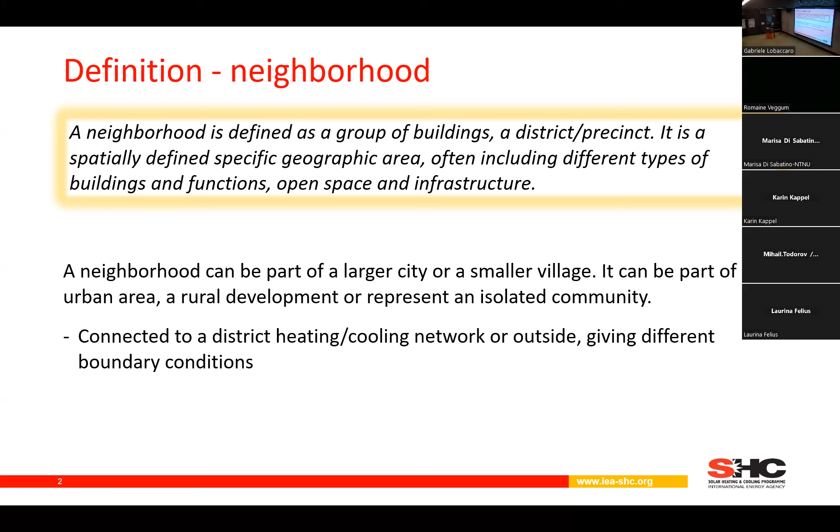So for solar neighborhoods, I want to highlight all the benefits we can have using solar in neighborhoods. We can use it for passive solar energy, both indoors and outdoors, to reduce heating demand and improve thermal comfort and health. We can use it for daylighting buildings and outdoor areas, and in this way reduce electricity for lighting and improve visual comfort and health. And we can use it, of course, to produce energy locally using PV and solar thermal systems, creating energy and resource efficient, self-sufficient environments.

And then we don't have to rely so much on energy imports, and we can create resilience to energy price fluctuations. Today this is really relevant in many countries. We can use it also for local food production and green areas for improved air quality and reducing stormwater.

There are a lot of benefits here, but we don't use solar as well as we could, as much as we could. There are good examples, and you will see a lot of them today, but we need to do more.

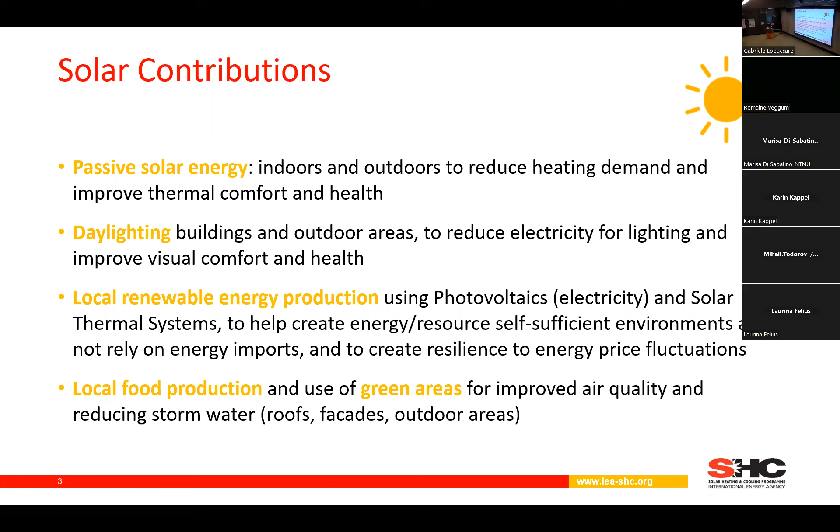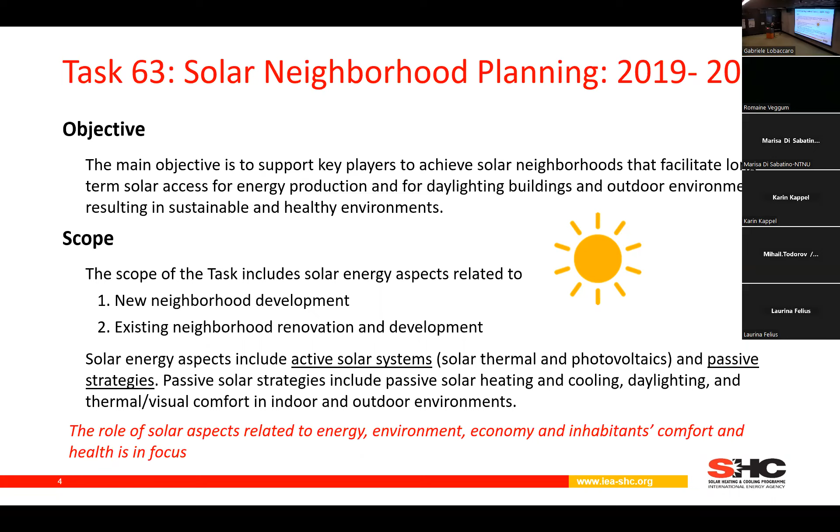That's why we started this project, Task63, on solar neighborhood planning. It started end of 2019 and ends end of this year. The main objective is to support key players to achieve solar neighborhoods, to facilitate long-term solar access, resulting in sustainable and healthy environments. We deal with both new and existing neighborhood developments, working on all aspects of solar energy, relating to energy, environment, economy, and the inhabitants' comfort and health.

We try to be organized in 4 subtasks, with different leaderships. Subtask A, on solar planning strategies and concepts, has a Canadian leadership. Subtask B, on economic strategies and stakeholder engagement, has an Italian leadership, and Silvia is here today.

We have subtask C on solar planning tools, jointly led by Sweden and France. Yuri and Martin are here today also, you will meet them. And we have subtask D, case studies, dealing with all the other aspects from the other subtasks, led by Norway. Gabriele and Mattia are here today also. You get some support from the other leaders as well. And then I'm the overall project leader.

We are 9 countries participating in this project, from Australia, Canada, China, and some European countries. I won't say more now, you will listen to all the experts presenting.

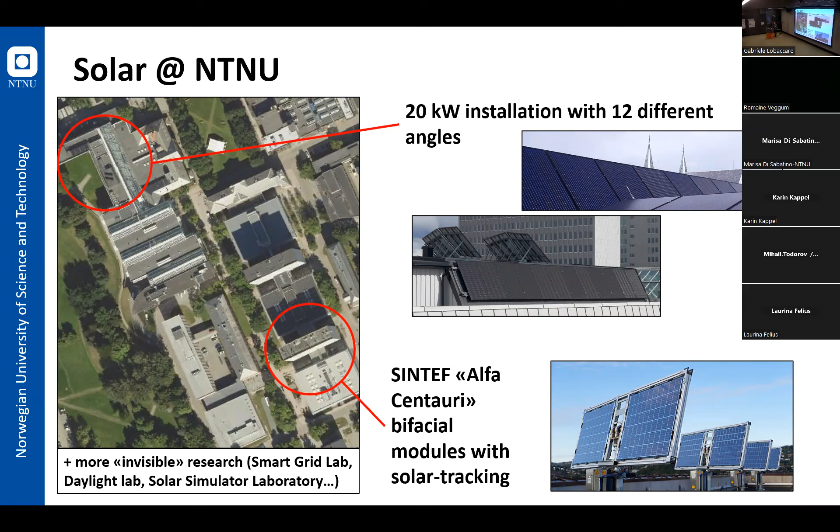Bifacial systems - there are also master students working on that. And there are many things you cannot see, like the Smart Grid Lab, the Daylight Lab, or the solar simulator, and all the buildings from ZEB and ZEN. So here too we have good collaboration between the people involved.

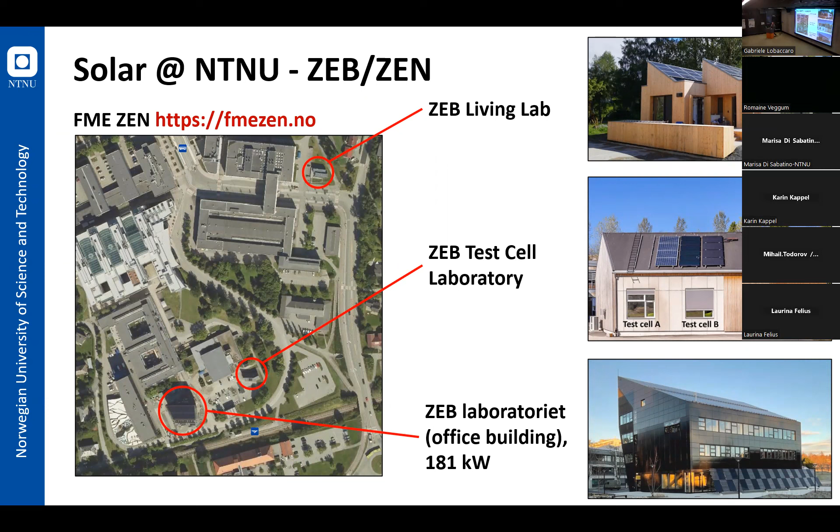The ZEB building is also very attractive for research, with all the different angles and the integration into the whole system, like energy storage and so on.

One of the projects I'm proud of is the Agri-PV project we will do at Skjetlein Skole. This will be the largest in the Nordics, the first in Norway, and the northernmost installation, consisting of 50 kilowatts. So it's not much, but still it's the largest one.

Here we want to look at both energy production and crop production, and how this solar installation will influence the microclimate. We are working closely with the school, which is an agriculture school, so we are also involving the pupils in measuring the grass, clipping it, and weighing it. First studies showed we will lose around 10% of the grass, but we can still produce 80% of the energy compared to a purely solar installation.

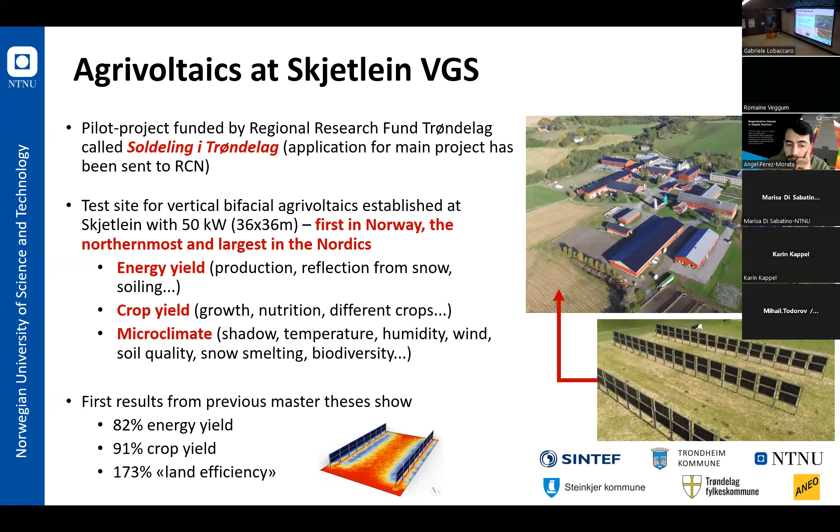So this we found out, and now we will build it. It is not yet in construction - we hope to get the first data this summer, and they will also get the battery system now. So this will be a very nice living lab for us.

That's all. So if you are interested in solar, working at NTNU, our students, our company, just contact us - Team Solar, if you just look it up - and we will find the right person you can collaborate with. Thank you.

I think, Steve, you saved 30 seconds. So yeah, are there any immediate questions from the audience?

Or for Maria as well. If you have any questions, don't be shy, please. No questions? I see many students here - I'm here the whole day, just come and ask. I see many students, so I think you should take the opportunity. He's the leader of Team Solar, many topics, so please take contact later on. Okay, so if there are no comments or questions, we go ahead with the program. Thanks a lot, Steve.

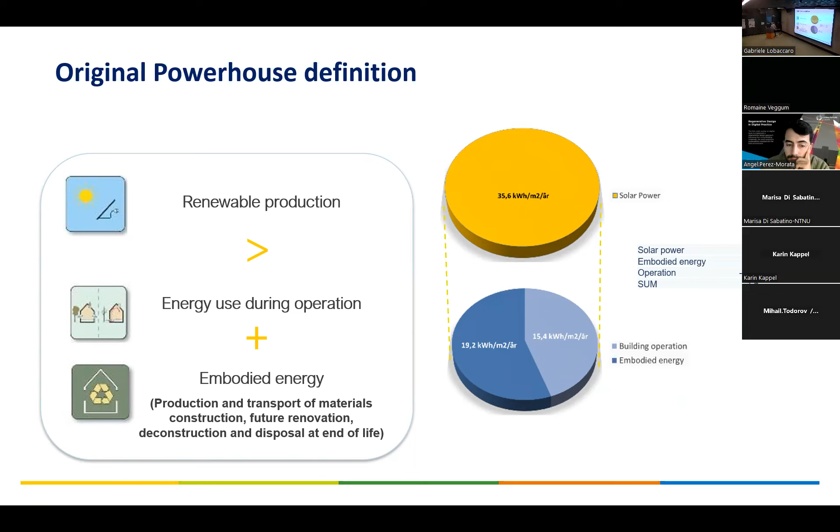And maybe the most important part is that we have to produce a lot of energy. This whole building is actually designed to fulfill that goal. You see the roof is inclined. I believe the inclination is 19 degrees to get a nice angle towards the sun. And the whole building is oriented towards the south. So the orientation is also not just random.

And you see that even though we have the whole roof covered with solar panels, it's not enough. So we also have panels on the southeast facade and the west facade.

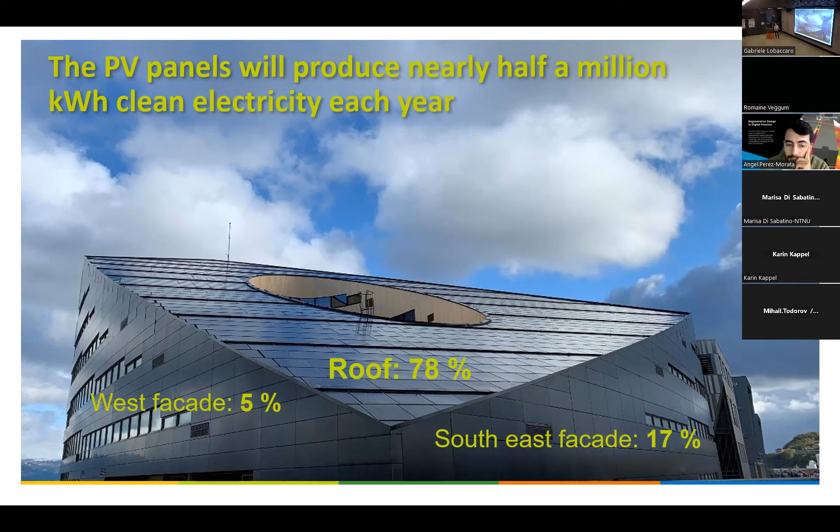And how much are we going to produce? On the left side there's the calculated solar power production for the first year, which simulation shows would be 458,000 kilowatt hours per year. And now that we have operated this building since 2019, we see that we have not yet reached that number.

And then the question is, why haven't we reached that number? Is it the weather, has it been bad the last 3 years? Has it been more rain in July than we anticipated? Or is the climate model used for simulation maybe too optimistic? I don't have a definite answer yet, but I think it's a combination of both.

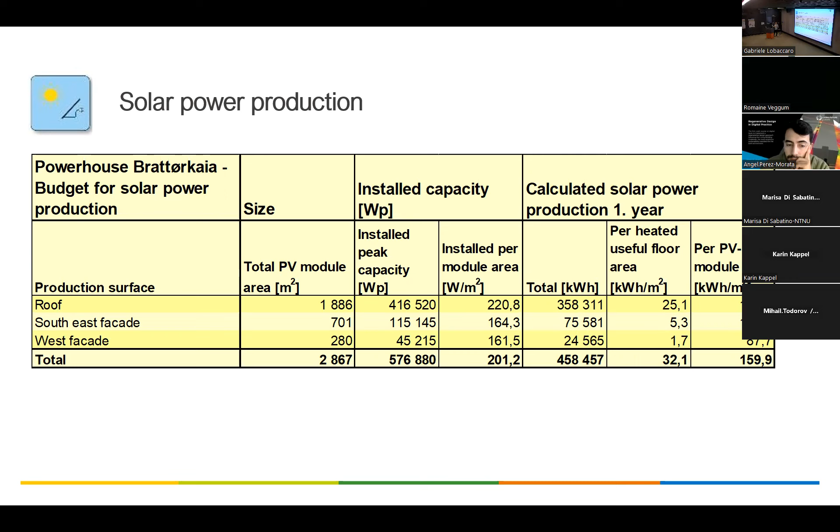So we will continue monitoring this building's operation and its energy production. And then we can see, when we have more data after many years, whether the standard year that the simulation gives us is actually good enough.

And here you can see the production. The red one is the roof, and the green and the burgundy one is the facades. You see the facades, of course, have peaks at different times during the day. This is in April, and then we're almost at 400 kilowatts of peak production.

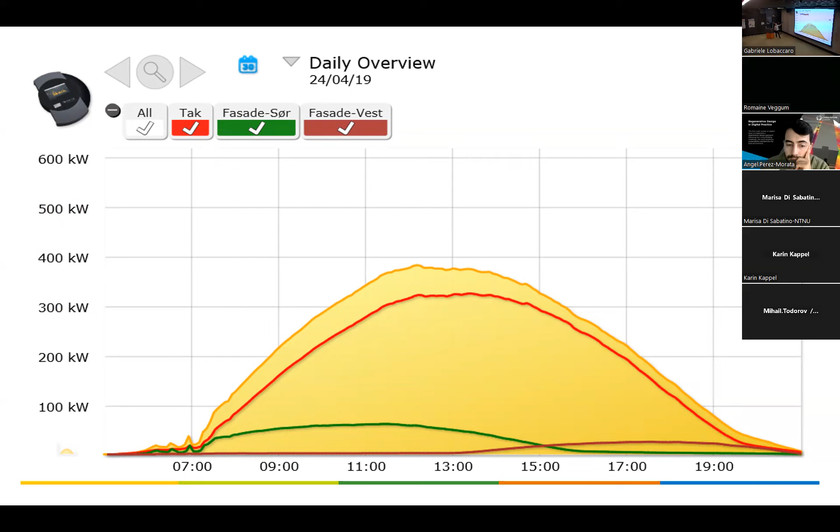So that's the production part of the powerhouse equation, but we also need to use low levels of energy operating this building. And how do we manage that?

I would say the most important part is our thermal system in this building. The heart of the heat system is an industrial grade ammonia heat pump in the basement, which uses the seawater in the fjord as the heat source. And the system is coupled together with our neighbor building, BK16.

So the heat pump makes 50 degree water, and the other building uses the 50 degree water first. Then this building gets the return from the other building. So we use 40 degree water, and we heat the whole building with water at that temperature.

And the heating system recirculates hot air during the night. So there's no radiators in this building. It's only heated by the hot air during the night.

And you see behind me here, there's a big exposed concrete wall. This whole building is very thermal heavy, so we're able to accumulate a lot of heat during the night, which then keeps the temperature stable during the day until the next night where we heat it up again.

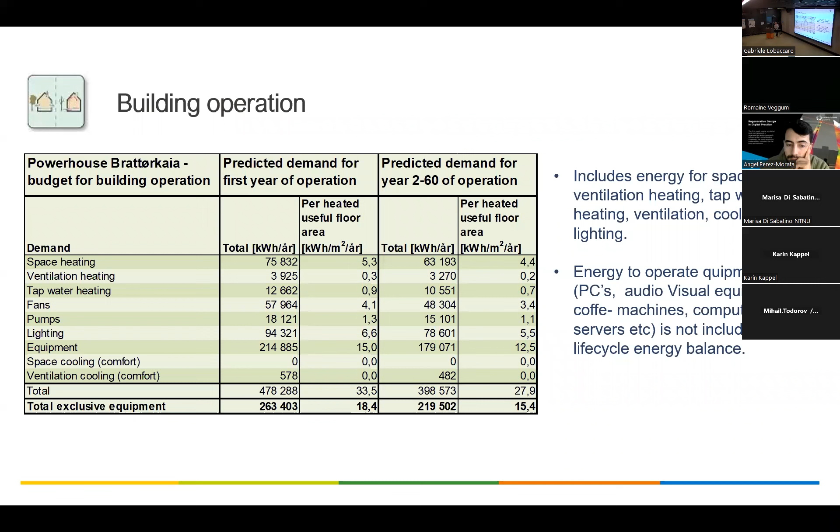So here you see the thermal exchange. First, the neighbor building uses the heat, and then this building uses the rest.

And the third part of the equation was that the embodied energy of the materials used is also low. For instance, in this project, Skanska developed a new type of concrete which has a very low climate impact. That's one of the things we did to have as little energy in the materials as possible.

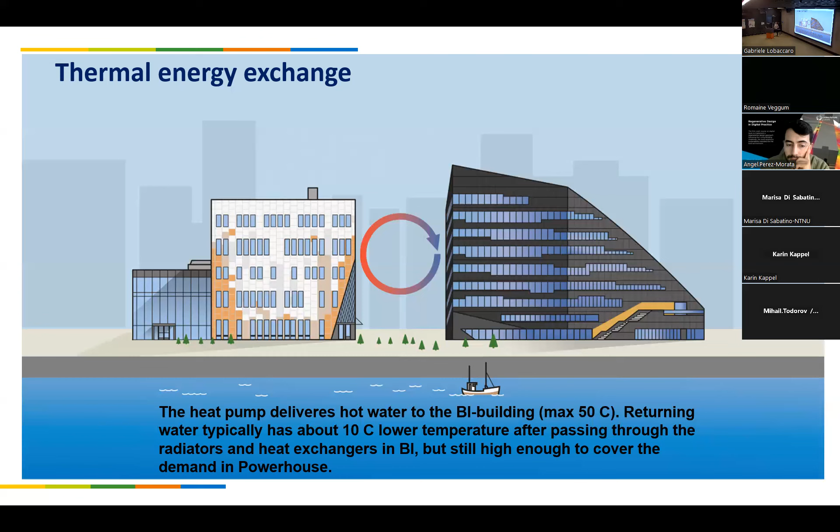And the next part is that this building is part of the Brattørkaia microgrid. This is part of the +CityxChange project. And since we have so much surplus energy from this building, we would like to share it with our neighbors.

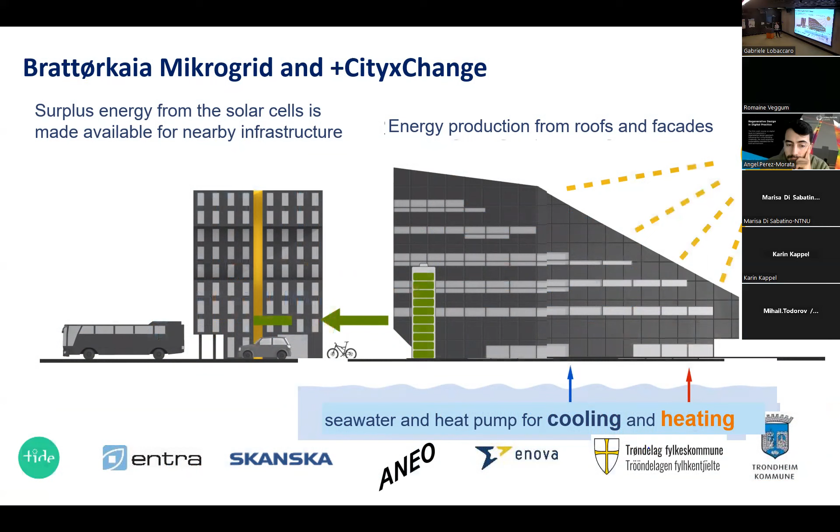As you can see here, our peak electrical demand is maybe 130, but on a good sunny summer day, we produce 450 kilowatts. So it's a huge surplus.

And also BK16 has a little bit of surplus. So then we would like to share this electrical energy with the electrical buses. There's a bus charger just over there, you can see it when you walk out the main entrance. And also there are chargers in the basement for electrical cars. There's also been talk in the future to supercharge the Coastal Express.

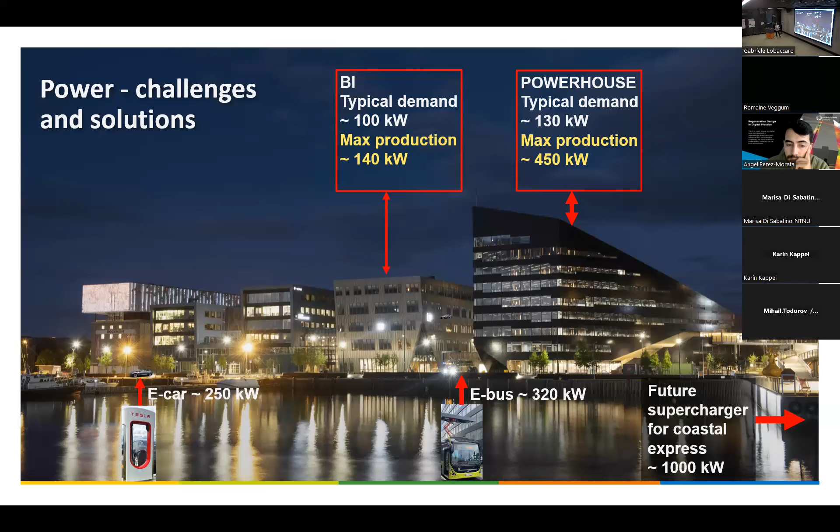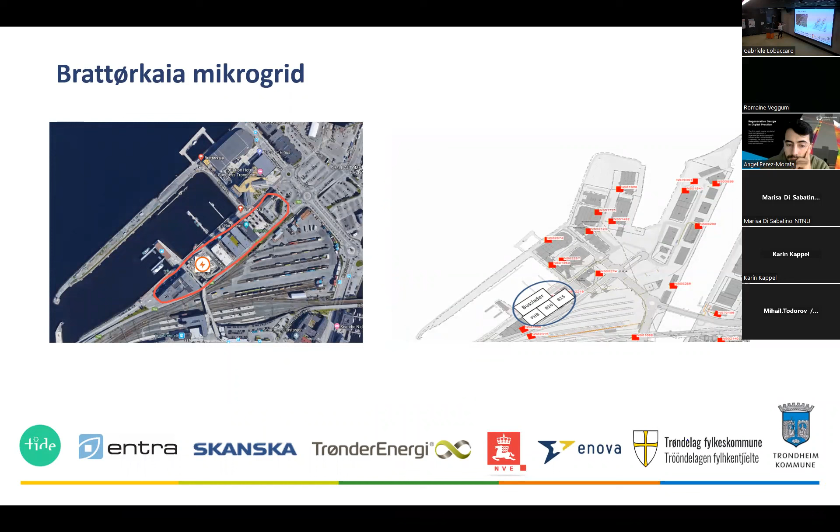And this is where we are now, the Brattørkaia microgrid. And the components in this microgrid are what we see here.

So we have two producers: this building here, and the other producer, BK16. And then there are 4 consumers: this building, BK16, BK15, and also the electrical bus.

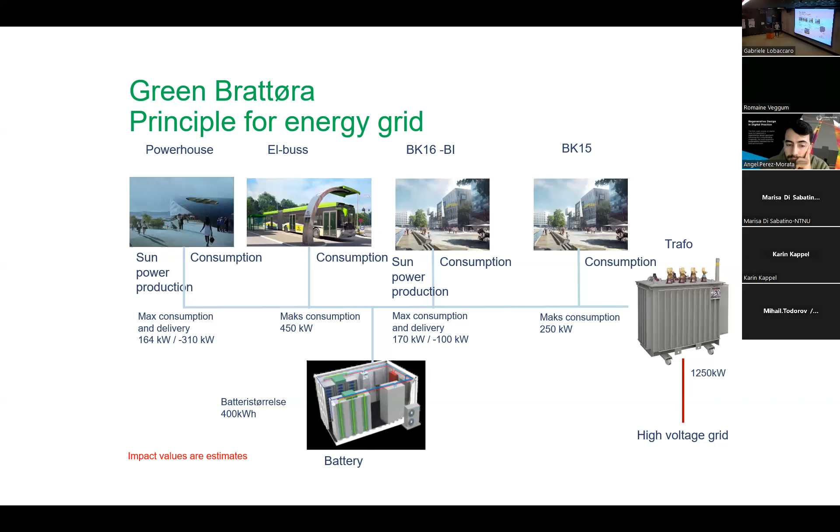And this grid also has a battery. You see the size is 400 kilowatt hours, which is maybe less than 1 hour of peak production, but it still has value in this system.

And this is the management principle of this microgrid. So we have a control system which can control the different parts of the grid. This system talks with the trading platform for the economic part of the transactions with electricity. And that trading platform talks with Nordpool.

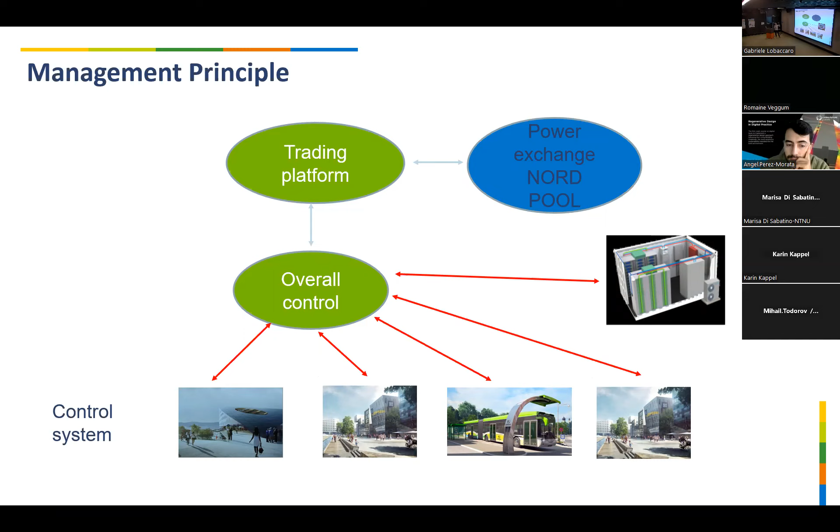This is the idea. And the question is, why do we want a microgrid in the first place? What's the benefit? As you can see in the left part of this power duration curve, if we at a neighborhood level are able to peak shave our loads, so the battery can spend its energy, if we can control when the heat pump starts, if we can accumulate heat in the thermal system, we're able to decrease the electrical peak necessary in our neighborhood area. And if there's a lot of areas like this at a big scale, the grid operator doesn't have to build out so much electrical grid because the peak is lower. That is a gain to society because we, as citizens, pay for the electrical grid.

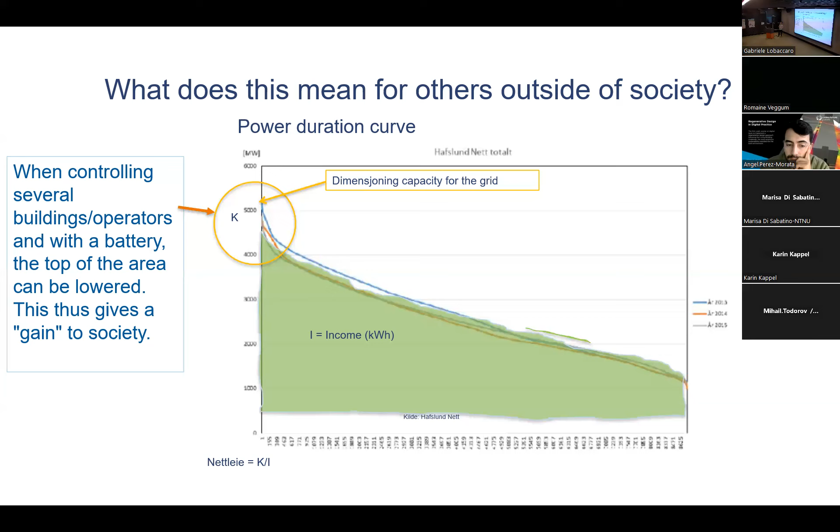And what we have learned from this microgrid project, the legislation is not where we want it to be. Right now it's very difficult to trade electricity across property borders. But thermal energy we can trade easily across property borders. That's one part. Also, if in a bigger system we're able to see the electrical and thermal system in context, the whole area will benefit. For instance, if the thermal system is built with a little bit extra accumulation, able to accumulate a bit more heat, maybe the heat pump can be turned off for longer periods of time, and the electrical peak of the area can be lower.

Yeah, that's my short presentation. So thank you.

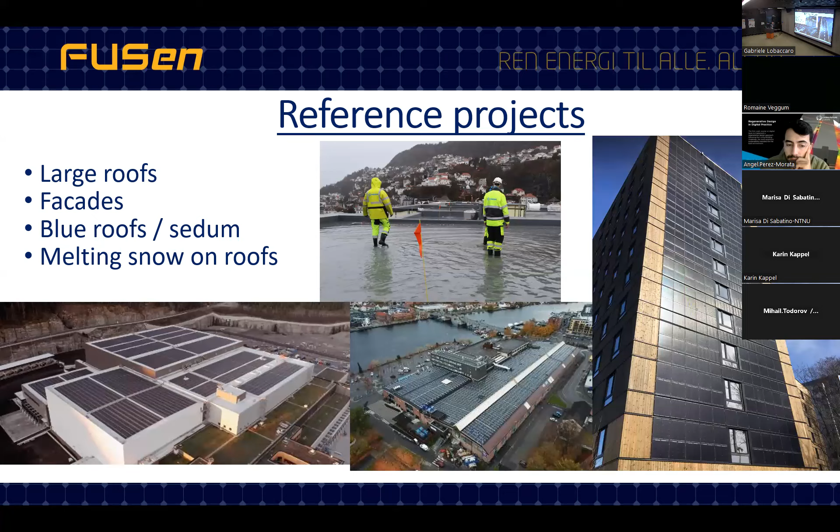So again, Bergen, and also I think that's a project in Oslo, to the left. In urban areas, we need to delay the drainage. You probably understand why, especially in Bergen, because when you're building new buildings, they don't have enough capacity in the drainage system to take off all the rain. So we have to stop drainage a little bit. In this particular roof in Bergen, it was a Skanska project, by the way, and I'm so happy to work with Skanska, because they're one of the clever guys in this business.

You told me it was 15 centimeters with water, that was the top level. If it gets more than 15 centimeters, an overflow system will take over. We had to lift the panels a bit, you can see the stones. They were lifting it at least 15 centimeters, so the panels won't be exposed to water permanently, and also won't freeze. If things freeze, well, we don't know, we have to be on the safe side, so we lift everything up.

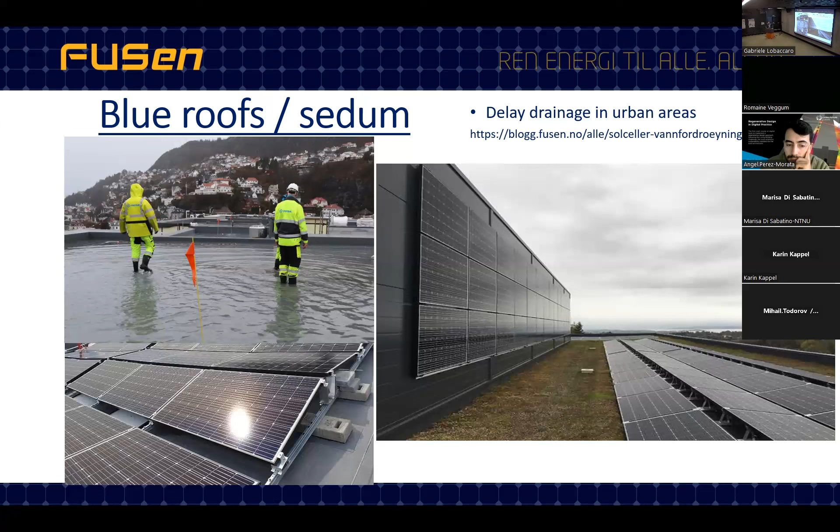Facades, industrial and urban. On the top right is from Asko Hedmark. That facade produces more energy per square meter than the roof, meaning that facades are super efficient. Depends obviously where you are.

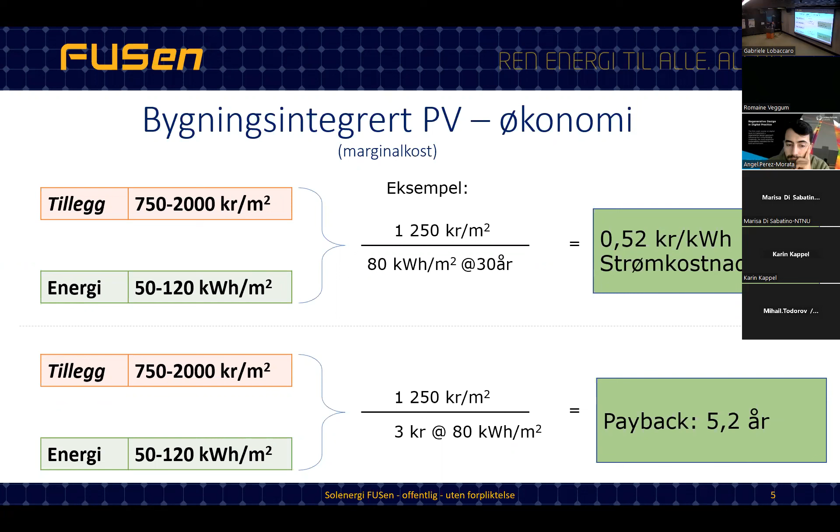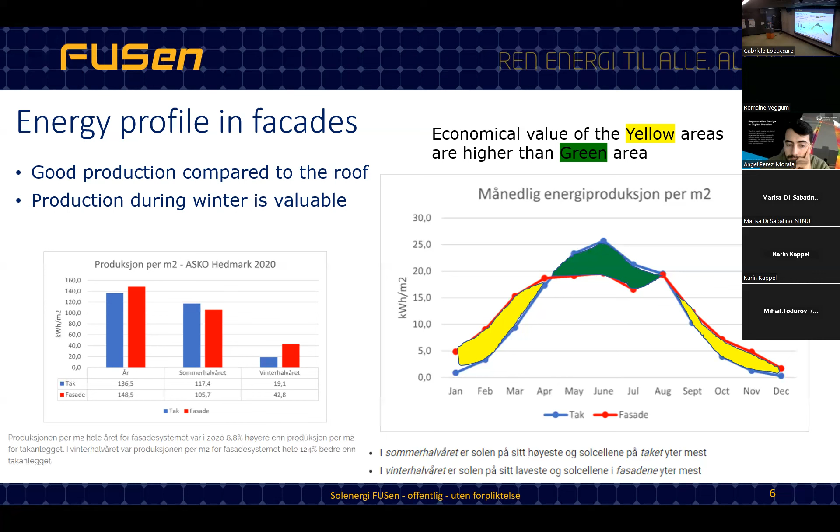So we have better production balance. And this is good - this is the first time a finance director called my manager to visit. We invented, in our sister company INOS, a system that we call a weight watcher. This means that it will...

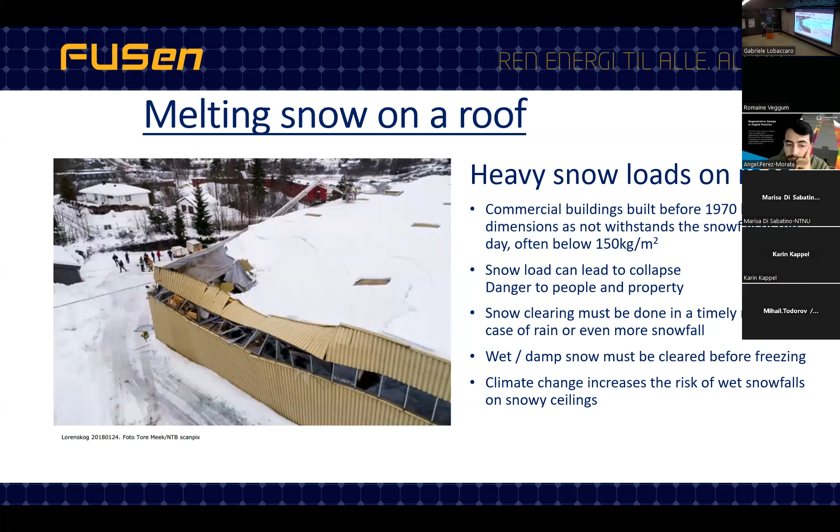measure the weight on the roof with a lot of snow. Then an alarm goes off and we turn on power and send that up on the roof. In 2018, there was a heavy snow load on the roof in Oslo, and these days the snow loads are much higher than before. The roof started to fall down - not good. So what do we do?

Well, remove the snow with heat cables or solar panels. We also turn on field by field, because we cannot send all the power to the whole roof - that would be too much power. So we just limit it to one field, second field, third field, etc.

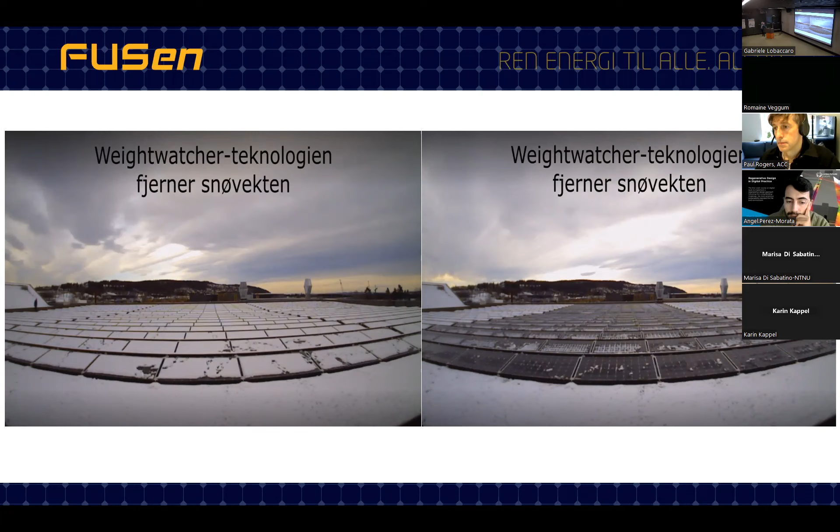This is from the downtown Kjøp Center in Porsgrunn. It was an old factory, and from time to time they have to send people to shovel snow off the roof. Some years ago, we sent boys from the football team up on the roof. That is not allowed anymore, because you have to be careful with people.

So what did they get? Well, we removed snow from the roof. We also solved the weight problem, because if the weight is too high the roof can fall down, or we have to evacuate the building until the snow load is less.

Then we also get rid of all the water. It's not just to turn on the power and melt it down - it would be a lot of water, and that water needs to get somewhere. It has to be drained. It needs to be simple in use.

You also need to control the weight on the roof, so we have sensors that always measure the weight. And then when I steal slides, I also have to read them more carefully, and I found out that we forgot something on that slide.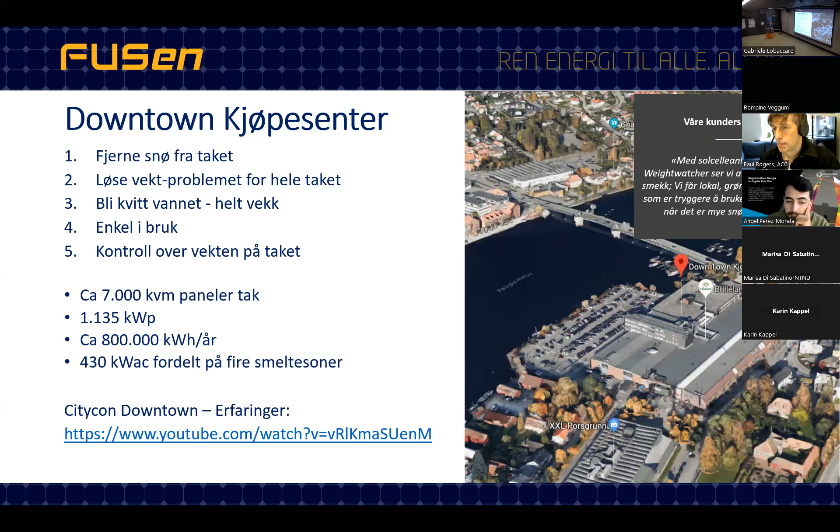Yeah, I think that was, yeah.

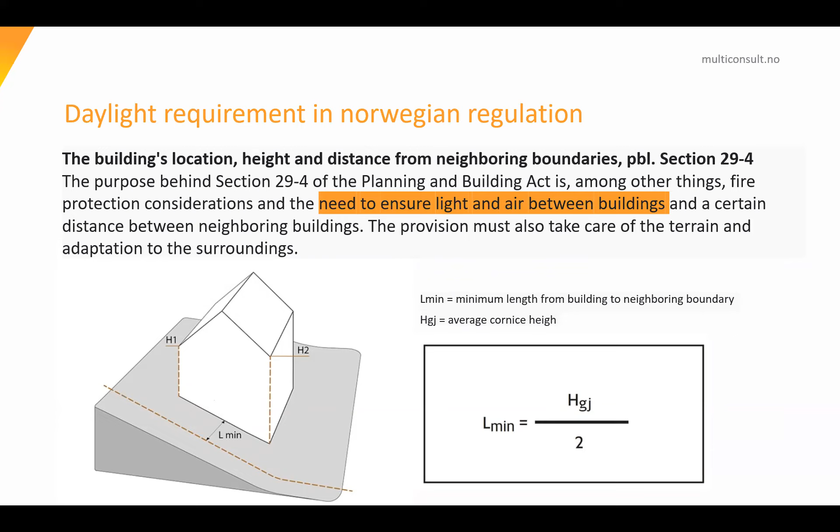If you look at the rules for daylight, we have a rule in the Planning Act for daylight percentage, daylight factor, it's 2%, and that applies to the building you are going to raise. So if you are raising a building, it has to have 2%, but it doesn't say anything about the consequence for your neighbor buildings. We also have a workplace regulation, and it's the same as in the Planning and Building Act, 2%.

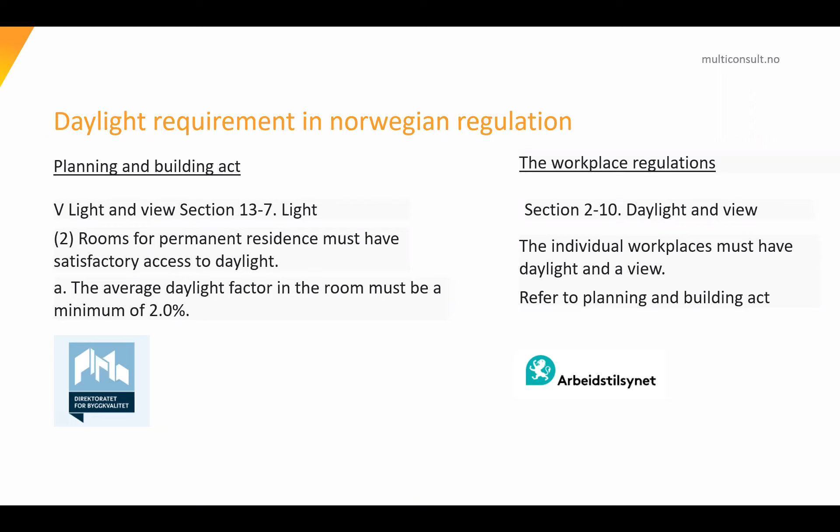But we have no rules that say if you raise a building, you should not steal the daylight of your neighbor. So that is still not protected. So we have a situation.

I think it seems that we have forgotten this section 29-4 when we're densifying the cities, and we say that we want to make a climate action, so therefore we have to densify. But what about the good health for people? What about the sustainable cities? And what about the increased inequalities for people that have to live in these areas?

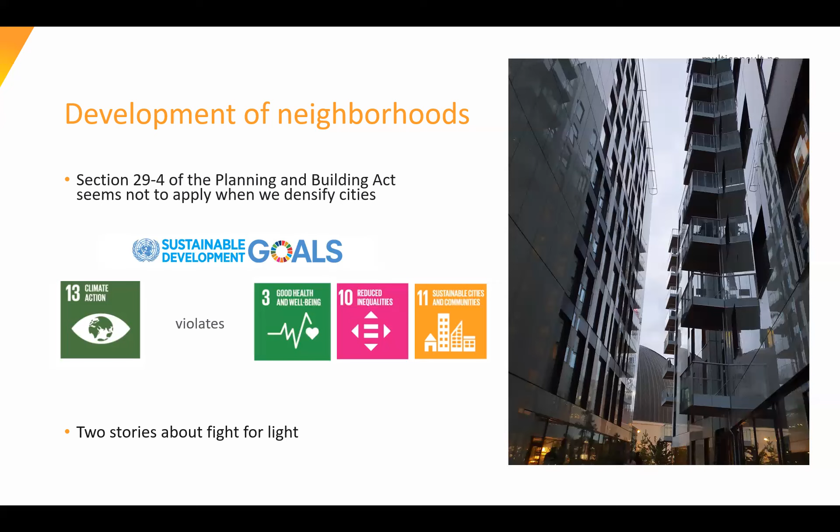And then I will present two stories about a fight for light. This story started in 2016.

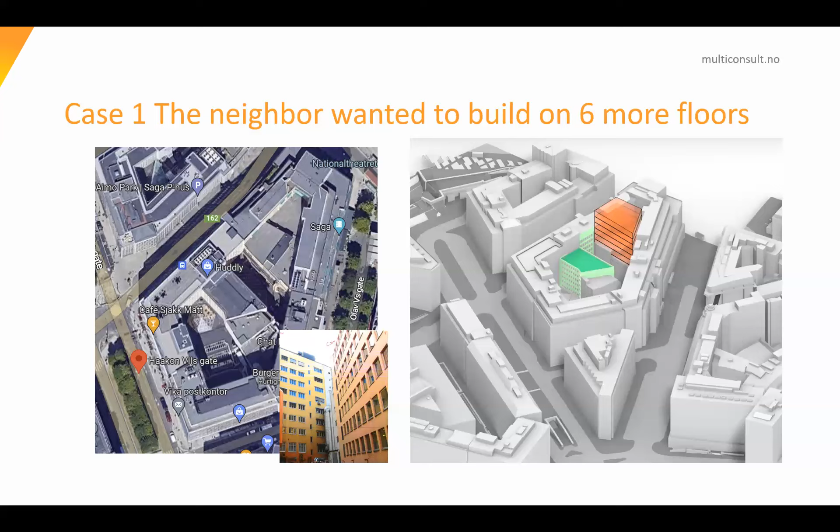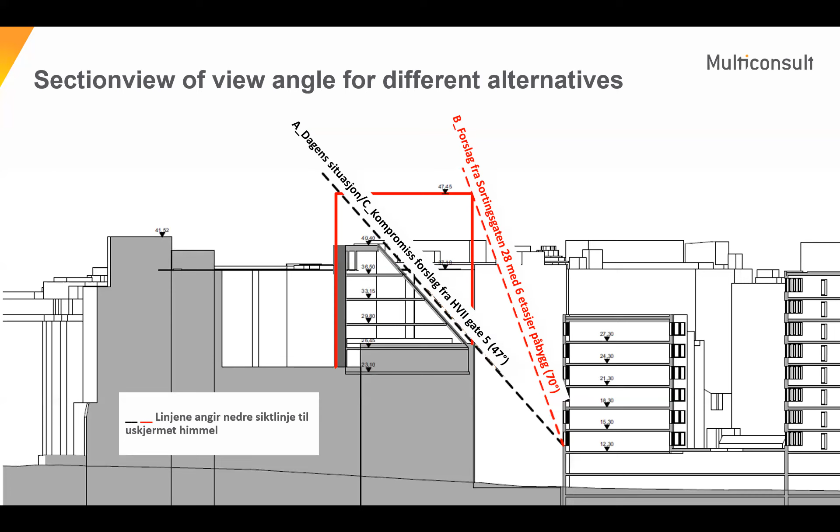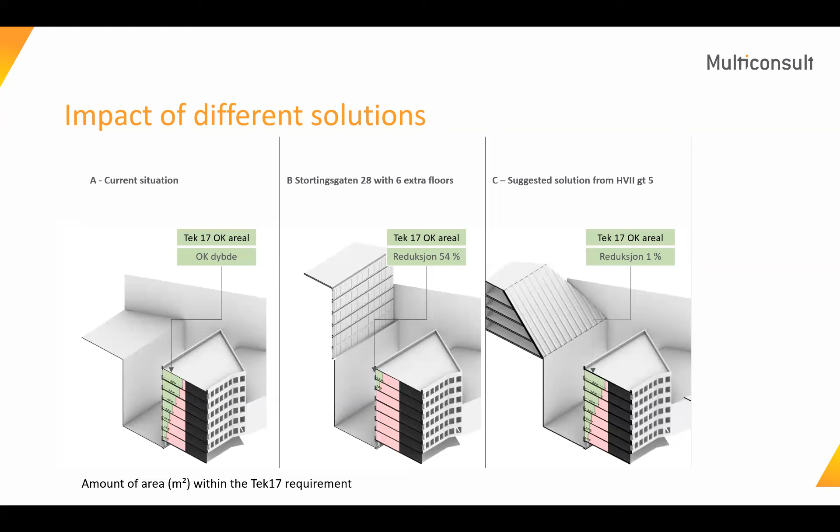But the thing is that you have to be a billionaire to win a fight like this, because he has spent millions on lawyers, on people like us, on communication people. So this is really not fair, that you have to be that rich to win a case like this.

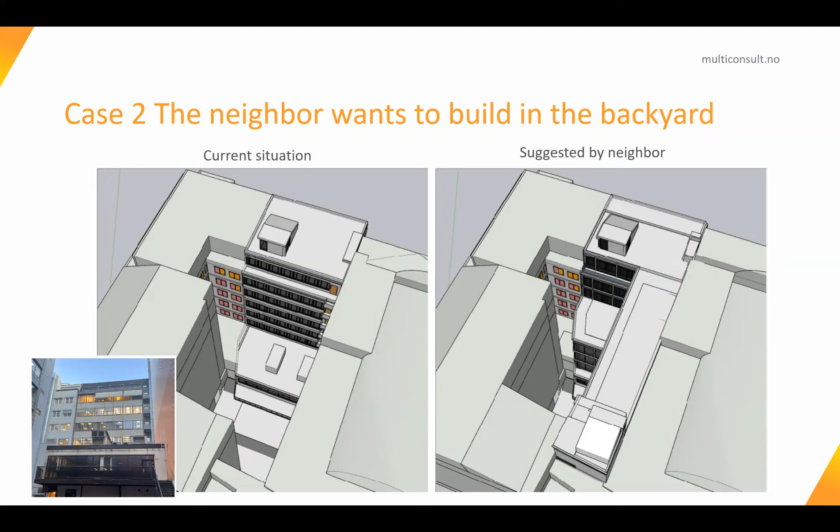They made a calculation and concluded that the daylight here in this backyard, it will only be minor changes if they build here. So they calculated, actually that is the client's neighbor's calculation, that this is a change of the vertical sky component, and it's only minor changes, so it doesn't have any impact.

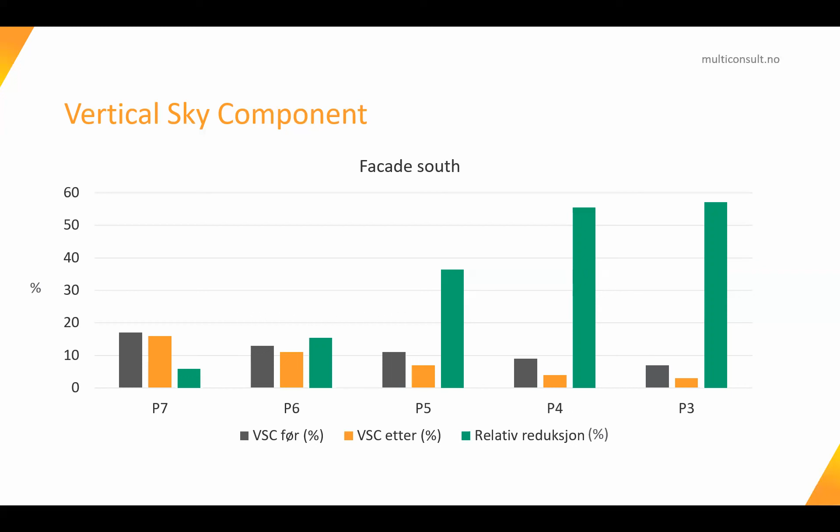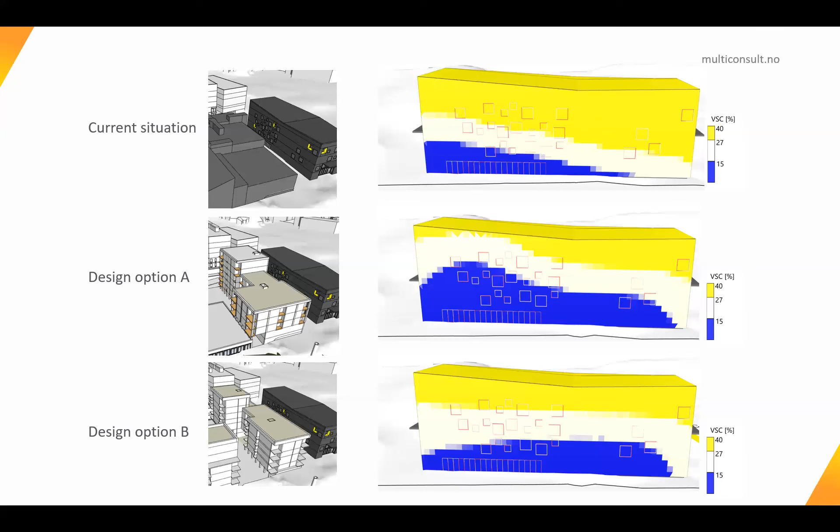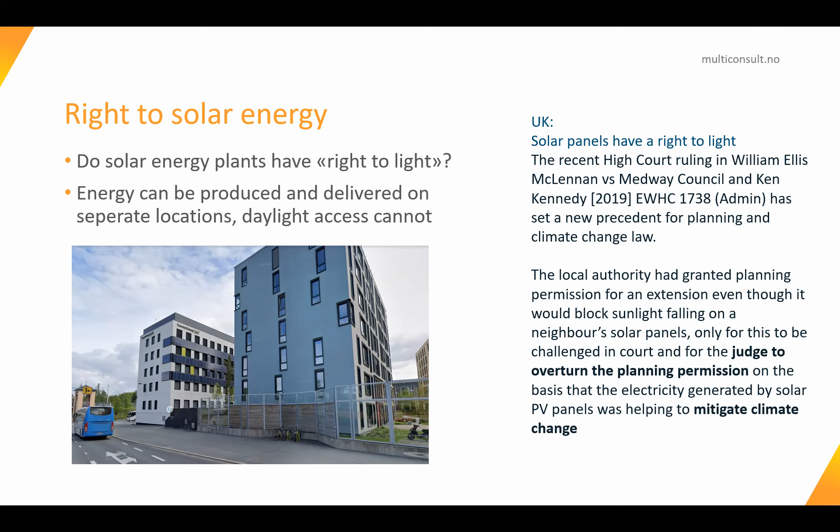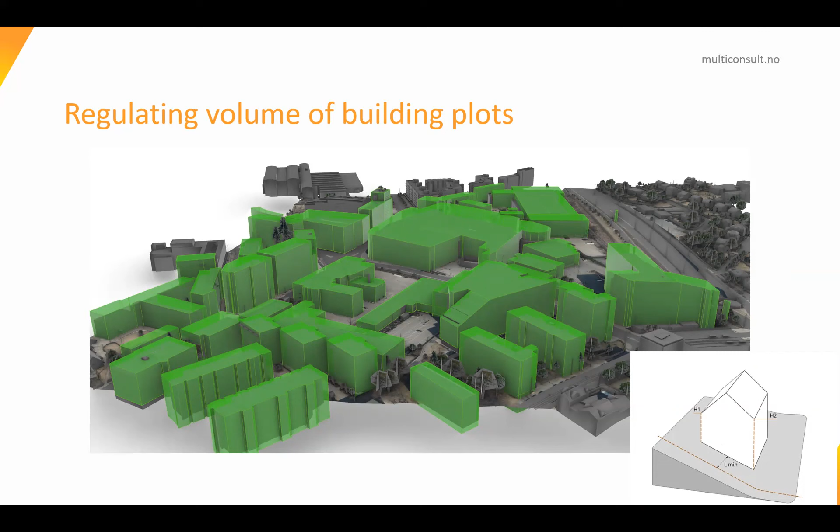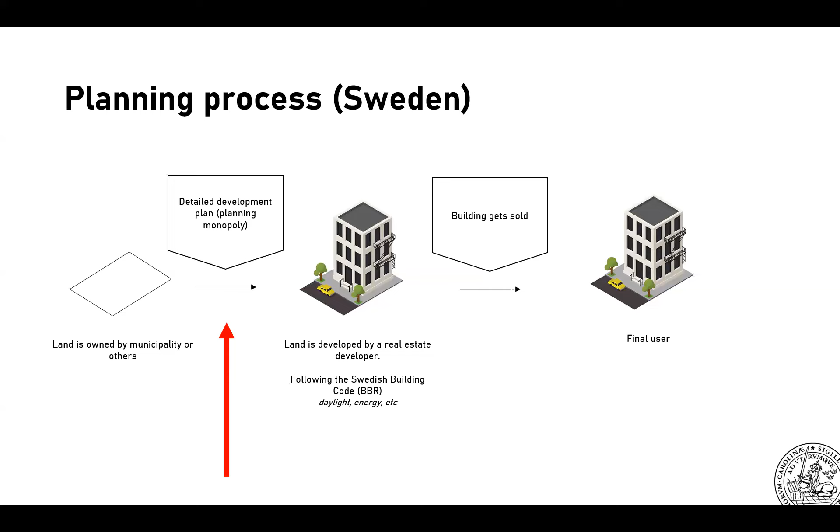In the Swedish building code there are lots of requirements, including daylight requirements as mentioned before. We also do not have right to light, so that's also a fight in Sweden as well. There are also requirements on, for instance, the maximum energy that can be used per floor area. Then typically the building gets sold after construction, to the final user. So there are lots of different steps and actors, and the final user is often quite disconnected from the whole process. I'll mainly be focusing on this step: what can urban planners do to make sure there is enough solar access when they start working in the urban planning phase?

We performed a survey amongst urban planners in Sweden and asked them how they work with solar access. First of all, they said there is no real definition of solar access, so for us it could mean different things. It's a bit like what Maria also said in Task63. We look at active solar energy production as one thing, we look at daylight, but we also talk about direct solar access, using the sun directly just to be in the sun, which is a quality of life.

Since daylight indoors is regulated in the building code, urban planners have to make sure that real estate developers can comply with the building regulations. So the first priority is to have daylight indoors, or make sure that the zoning plan they design ensures a good daylight indoor quality.

Urban planners are also normally very concerned about having access to the sun outdoors, making sure there's a livable city—a square without direct solar access is not a very good square. That also translates into financial value. If you had outdoor seating without direct solar access, it's not a very attractive place to be. The lowest priority, I'd say, in this context is active solar energy production within the urban planning phase, so they feel a bit disconnected from this part.

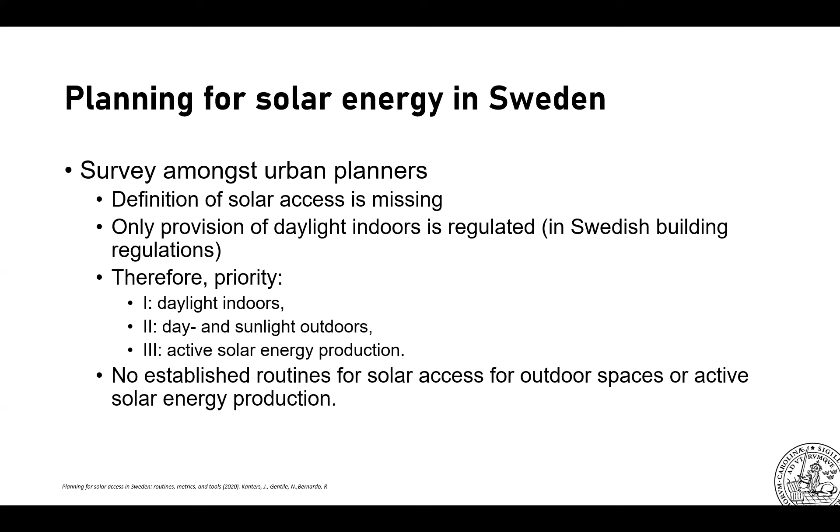Hopefully I can show you that urban planners already set the framework for all these things in the very beginning. There are not necessarily established routines for making sure there's enough solar access, and they also very often don't necessarily have the competence or the right tools to actually work with solar access.

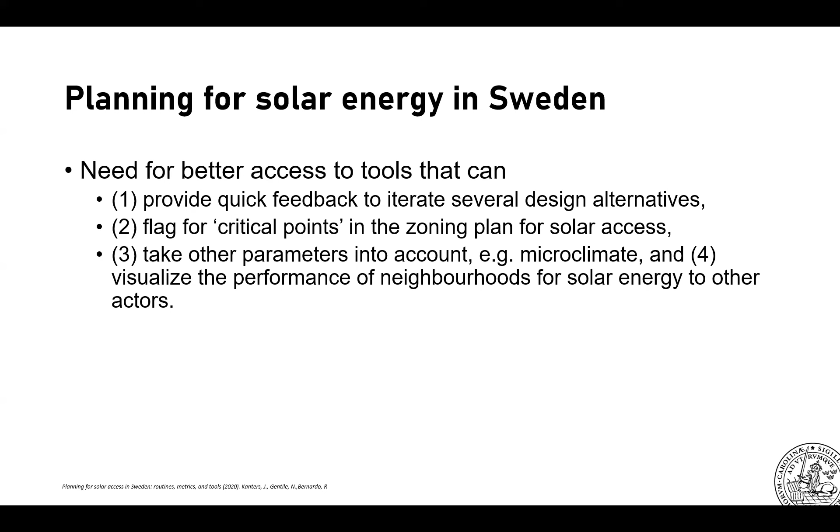Those settings in the detailed development plan are very crucial for implementing active solar energy systems. If your roof inclination is 45 degrees or 20 degrees, that's going to be quite a big difference—maybe in a place like Norway as in Sweden—it is decisive for your energy production.

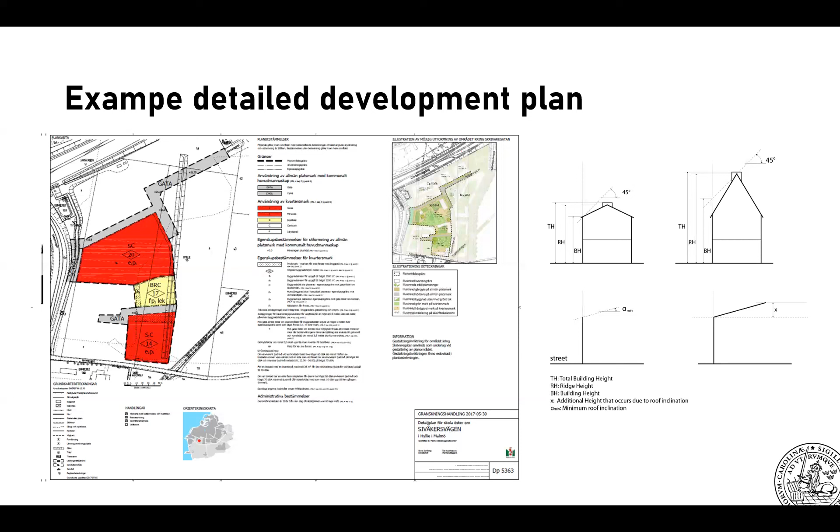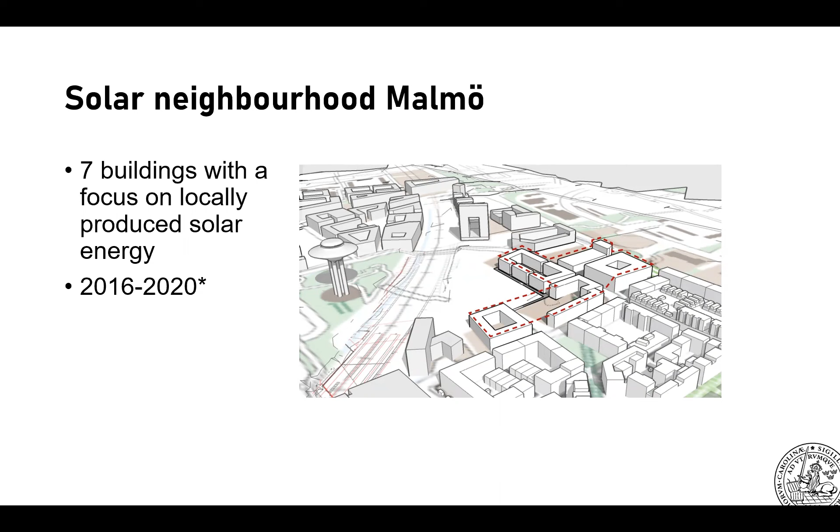So the city of Malmö wanted to try to come up with a detailed development plan that was beneficial for locally produced solar energy. I was involved in designing this detailed development plan together with the city, from 2016 to 2020. It's located in Hyllie, the first train station if you come from Denmark—the most southern part of Sweden. This was the first detailed development plan that we developed.

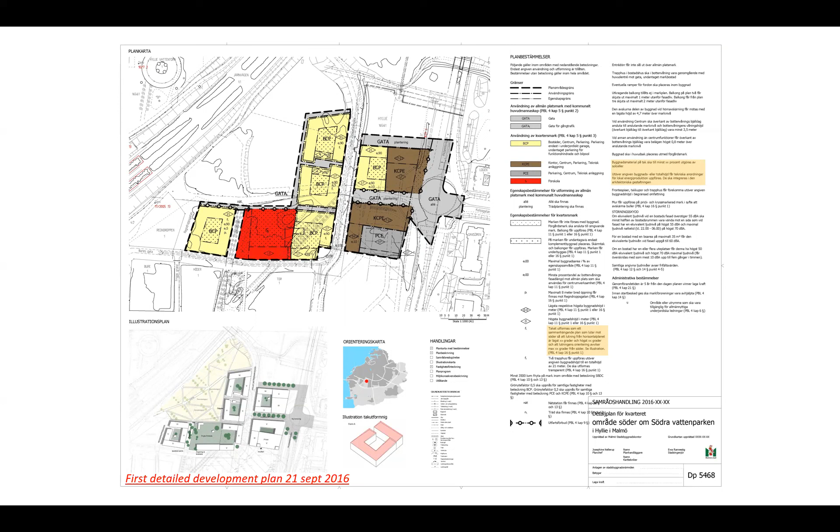You can see here some building footprints—in yellow the residential buildings, and in red the school again. This is how the urban planners did it, the normal procedure for how they work: they designed the buildings, and then we start talking about how we can make sure we create good conditions for, in this case, implementing PV systems.

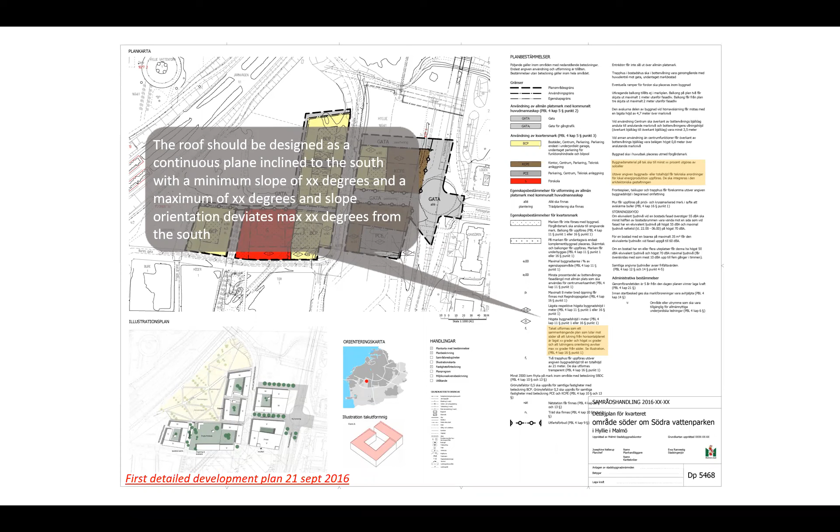So we start talking about what kind of requirements we could put in the detailed development plan to make this easier. For instance, you could set the roof inclination, a minimum and maximum slope, which could be beneficial for production. You can also set building materials to be used in the Swedish context—for instance, saying a building needs yellow bricks as a facade material. So if you consider PV as a roof material, you can put this in the requirements.

But then, you cannot force the real estate developers to actually put it in, which I think is pretty interesting. That's not allowed.

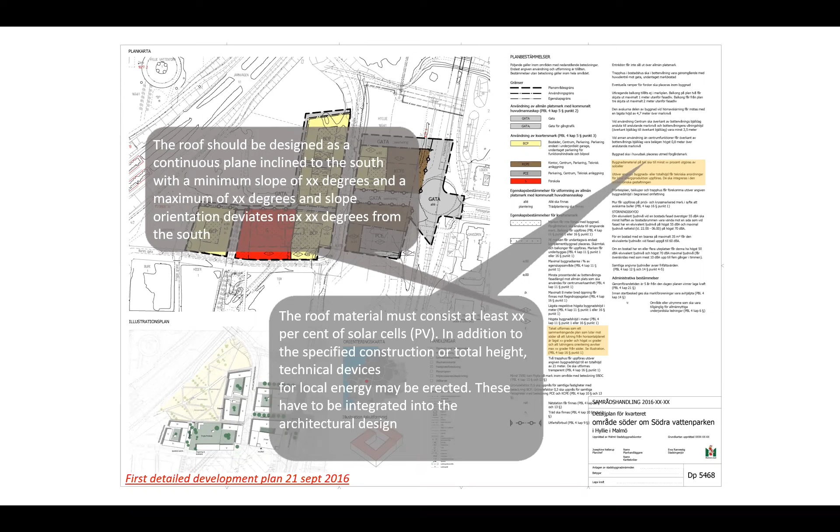But then the city didn't want to go this far. In the end, what we ended up with was a detailed development plan describing the minimum and maximum slope of the roofs, and the fact that you could put up PV, but they have to be integrated into the architectural design of the building. So the first building that was constructed had a very small PV system on the roof, which was not visible. This has different political reasons, I'm not going into that, that will require another presentation.

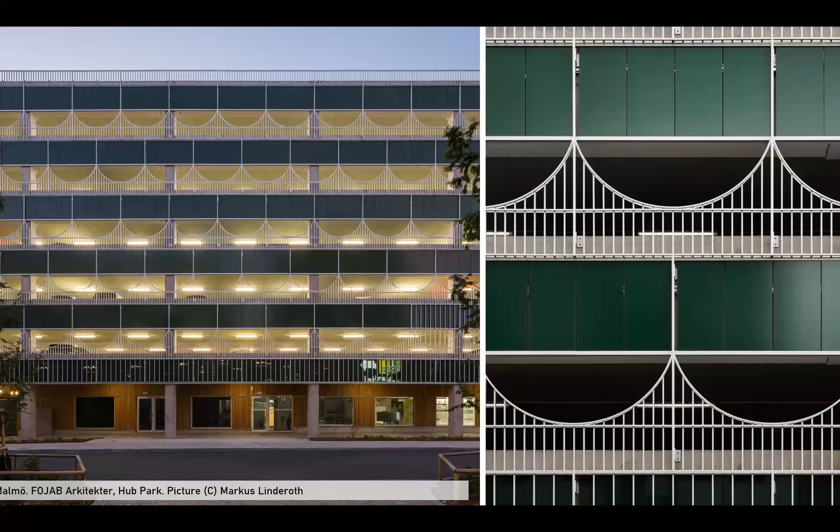But after a while, the city noticed that real estate developers got very interested in the concept of integrating PV more architecturally, you could say. This is one of the latest buildings that have been constructed, a mobility hub designed by FOJAB, where you can see green PV systems integrated into the facade. So it became quite popular for the real estate developers to actually start thinking about integrating PV.

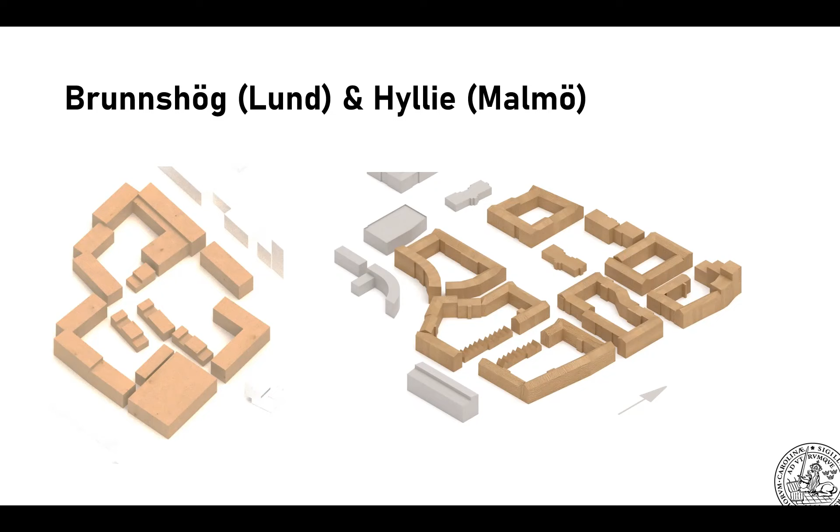So then we continued working with the urban planners, both in Malmö and in Lund, which is a neighboring city, smaller than Malmö. I think it's interesting to mention that the bigger cities have maybe the right competence within the city to think about daylight, have established routines, and can buy licenses for simulation tools. But the smaller cities or even smaller municipalities do not have this competence. So we help them make sure that already in the very early design stage of the urban planning...

...they take the right decisions. So we discussed with them whether the detailed development plan was good enough, so there was enough daylight indoors, and we also discussed the solar access on outdoor spaces, and also active solar energy production.

So basically this is the workflow. The urban planners provided us with 3D models of their detailed development plans. We ran some analyses, and I think the most important thing was that the analyses themselves were not super advanced, but it was more than the urban planners normally had access to. So we had a discussion with them, and I think that was the most important part of this workflow, discussing the results of our analyses. If they were satisfied, then they went on with it. If they were not satisfied, we could reiterate different loops and try to improve their zoning plan.

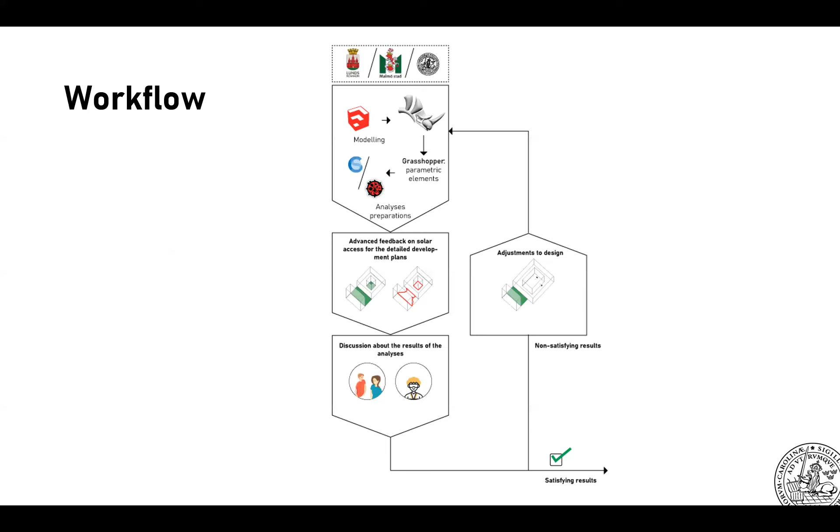So what kind of analysis did we do? For instance, we looked at daylight provision. The Swedish building code has the requirement of a daylight factor of 1% at the darkest wall. It's not super relevant, but we just wanted to show what happens if you have a different window to wall ratio.

I should also mention, in the zoning plan, the urban planners do not set any window to wall ratio or openings or windows. They leave that up to the real estate developer and their architects to design. So we said, okay, what happens if you have a 10% window to wall ratio or a 90% window to wall ratio? How easy is it to comply with the building regulations?

Or we also run vertical sky component analysis just to show the points in the zoning plan where it might be very hard to actually reach good daylight indoors, very similar to what Tobias and Ida just showed.

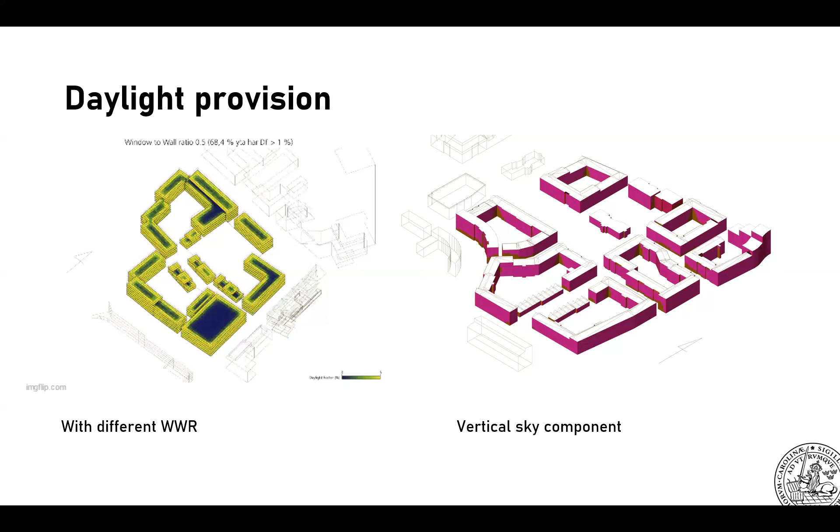We had, I think, the most discussions on direct solar access outdoors. The city of Malmö had an internal requirement saying that 50% of all the courtyards we designed should be sunlit on the 21st of March, if there is sun, but let's assume it is. But lots of the urban planners involved in this process didn't really like this requirement, because it means if you have a very long courtyard, you will actually meet the requirement pretty easily, but that's not always the most favorable form or shape.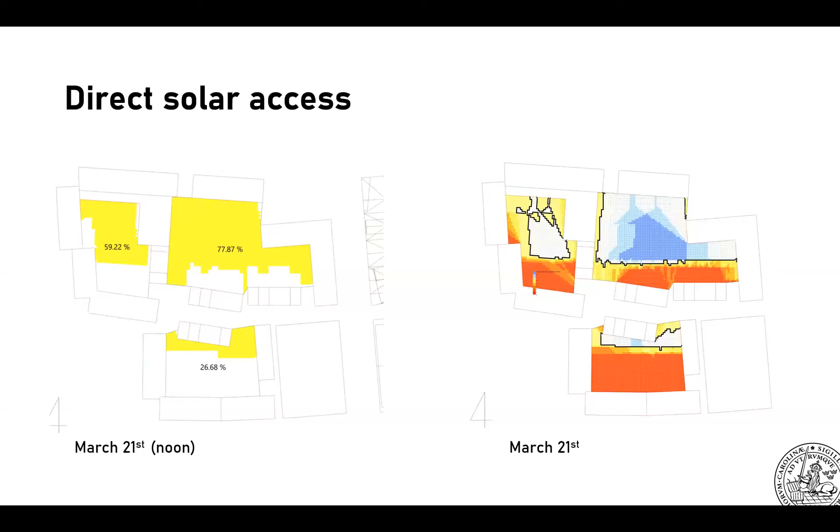I said, okay, well, maybe that's good. Keep in mind, there is no legislation on this, so we had to kind of together find out what is a good quality. Here we looked at the annual direct solar access, trying to find out what is a good metric and what are good thresholds. Those are exactly the same analysis, but just visualized in another way to make it easier to understand the result.

For instance, if you would have an unobstructed plain without buildings or trees, that would be the maximum, 100% of the possible hours. But then we categorize them, for instance, 0 to 25% of the possible hours, or 50 to 75%. So the left picture is exactly the same result, just visualized in a very different way. We were together looking for what kind of feedback you want on your zoning plan.

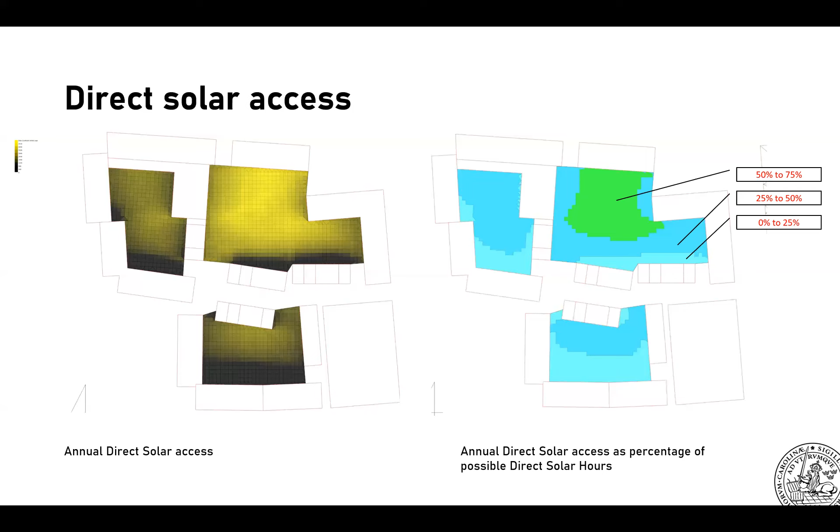We also run very quick active solar energy production calculations. If you match that with the floor area, you could take a template value for the energy use, then calculate quickly how much you can cover if you implement PV systems on all of these colored areas. That would also affect the urban area - if you implement PV on all of these surfaces, it gives a very different image than if you just cover, for instance, the roof, which gives a lower coverage.

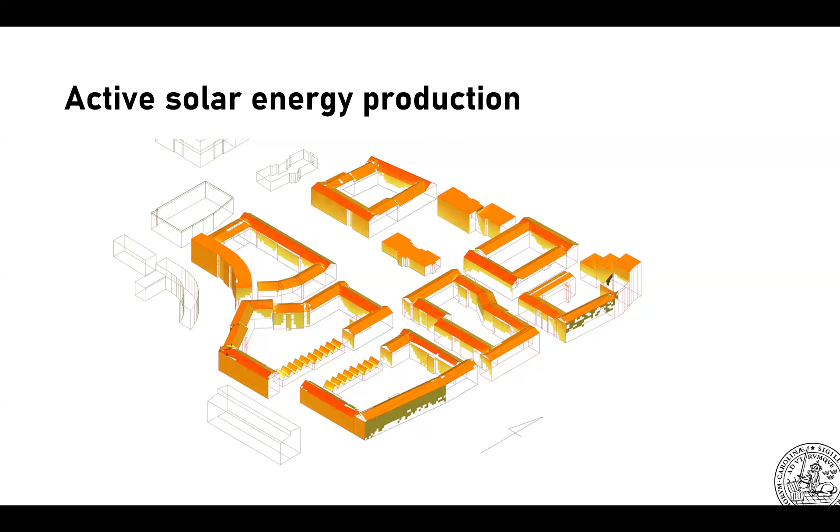So lots of things are still unknown. As I said, only daylight indoors is regulated, but nothing else. So next steps in our research include my colleague Agnieszka looking at what kind of thresholds - like the 5 hours I mentioned on the 21st of March - is that actually something people want, or where does it come from? Is 5 hours good, or maybe 2 hours? We don't know, so that's under investigation. With that, I thank you for your attention.